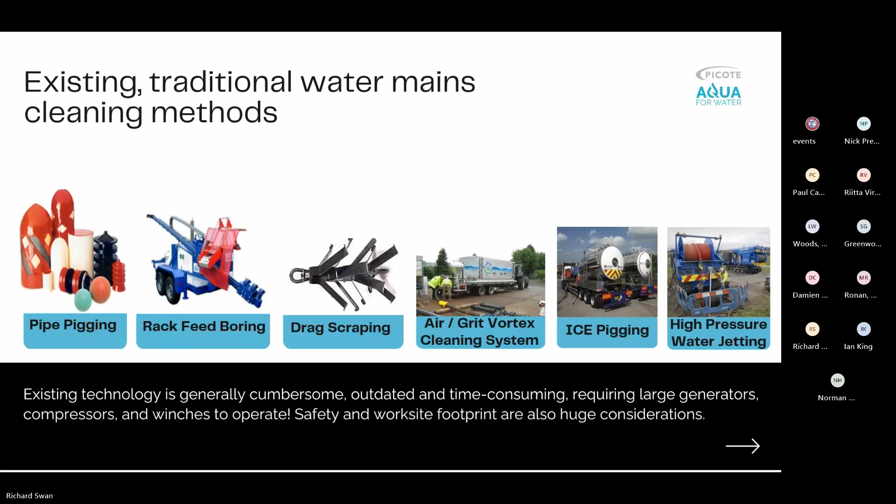So what is high-speed cleaning for water? What we've done is taken the fast, efficient machines that are widely used in the wastewater side, in drains and sewers. It's tried and tested, and we developed a whole load of innovation of tools etc. to go to work in this industry.

We call it high speed because our range of machines, at the slow speed, rotate at 500 RPM, and then depending on the machine will go up to 1500 to 2000 RPM. We have a range of tools developed to go with them that are suitable for descaling, cleaning, grinding etc., without resulting in damage to the host pipe.

The machines themselves have a steel shaft that rotates round, but we have an outer protective casing, so the operator is holding the outer casing at all times — he's not touching anything that's rotating. We have electronic control boxes, so there's a built-in safety mechanism. If the demand for power increases at some stage, the machine will trip out.

The machine trips out with the electronic safety clutch, so there's no risk of injuring the operatives etc. We also have a foot switch, so the operator controls it that way. We have the control box, we can vary the speed, and we have an emergency stop button as standard. But the important bit is that we've got a safety clutch and the outer casing holding the shaft.

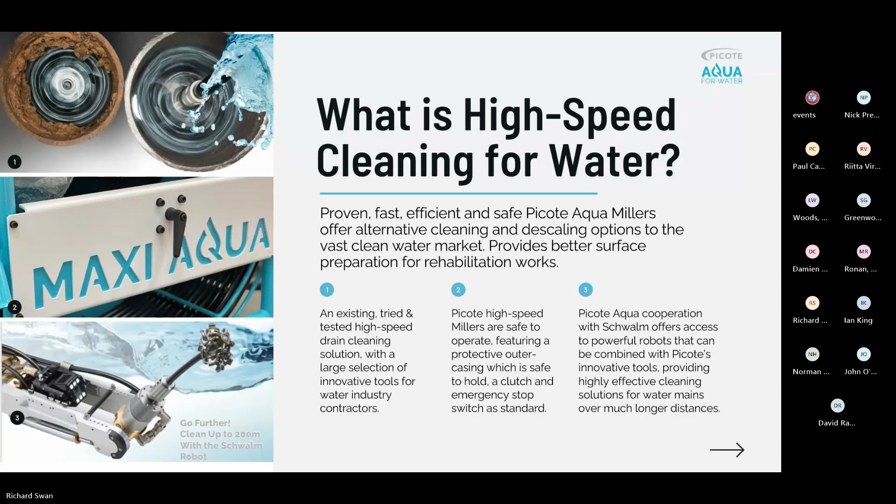So benefits of high-speed cleaning — from automation, to health and safety, because of the way the machines operate. We don't need water; we can operate the machines dry in a dry situation. Water just helps to keep the tools cool, but we don't need actual water there.

They're very efficient, and certainly when we compare to what we do on the wastewater side — descaling cast iron mains, vertical pipes, etc. — we are very, very efficient.

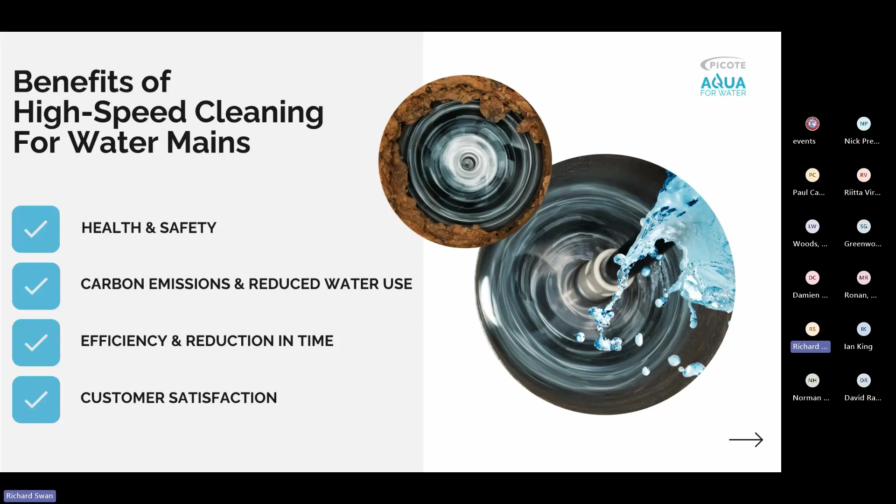For an example, what might take a day root cutting is now reduced down to an hour, maybe a couple of hours, which means it's great for the customer because we're in and out very quickly with the machines.

For those who've not seen high-speed cleaning, here's a little video. What we've got here is we're using our 12mm super MIDI, and on there we have what we call a cyclone chain. As the speed increases, the chain opens out, and as soon as the shaft starts rotating, you'll see that we start actually cleaning, and we're going to create a load of dust.

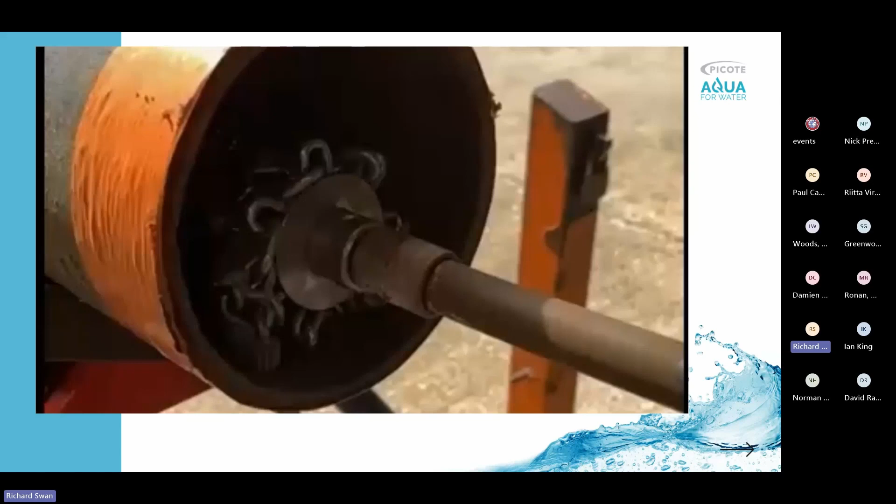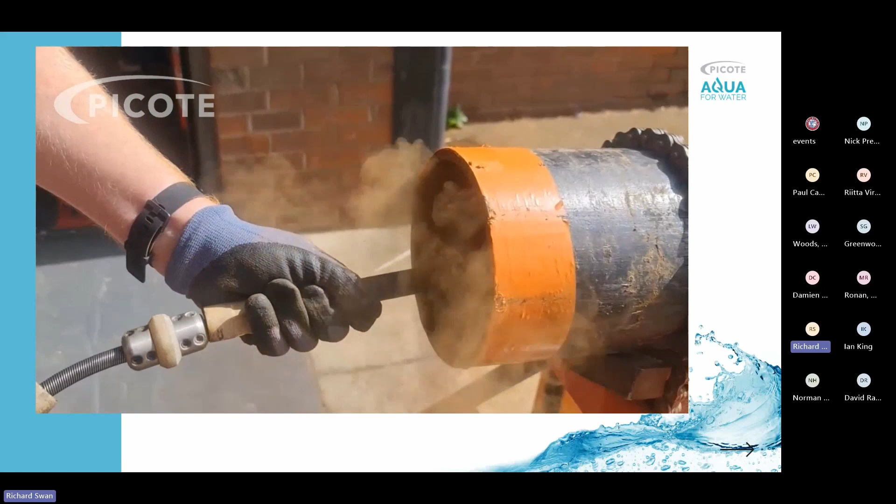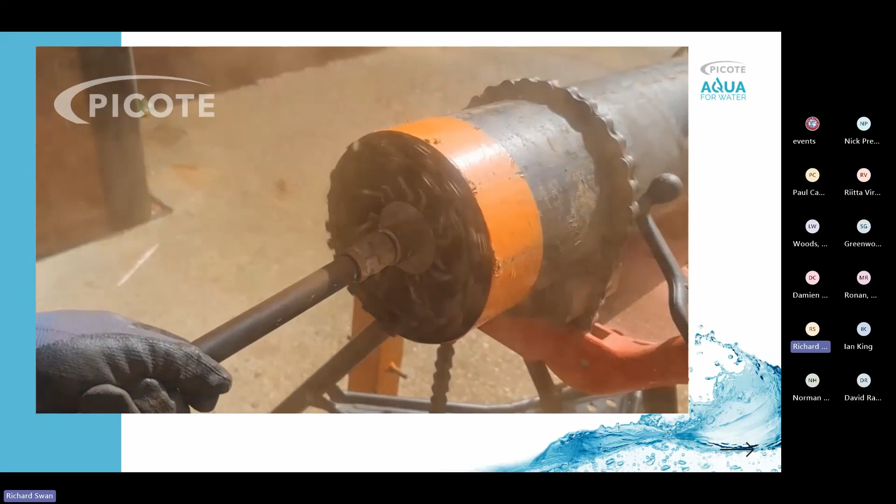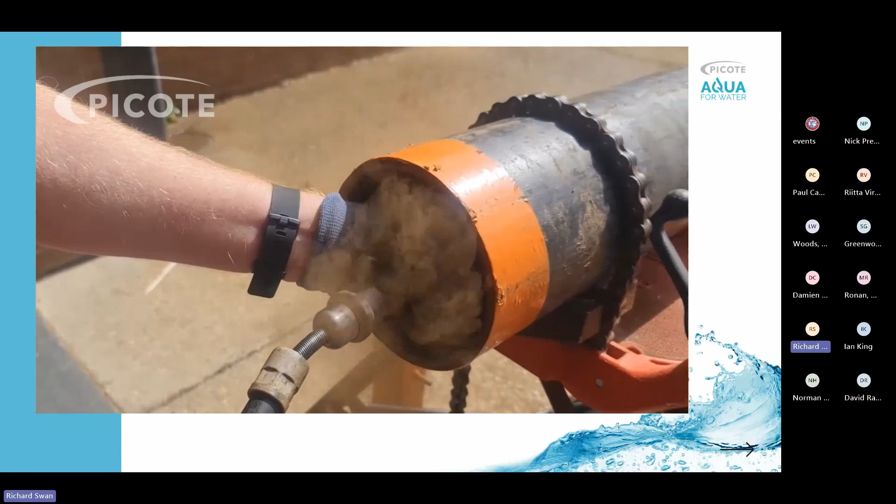This cyclone chain has carbide teeth, and that's why it's very efficient. You can see here we're holding the outer casing, and as we slowly pull back, we're descaling and cleaning the pipe as we come back. We run this through backwards and forwards a couple of times, but you can see how efficient this is, and how safe it is compared to some of the systems that are out there.

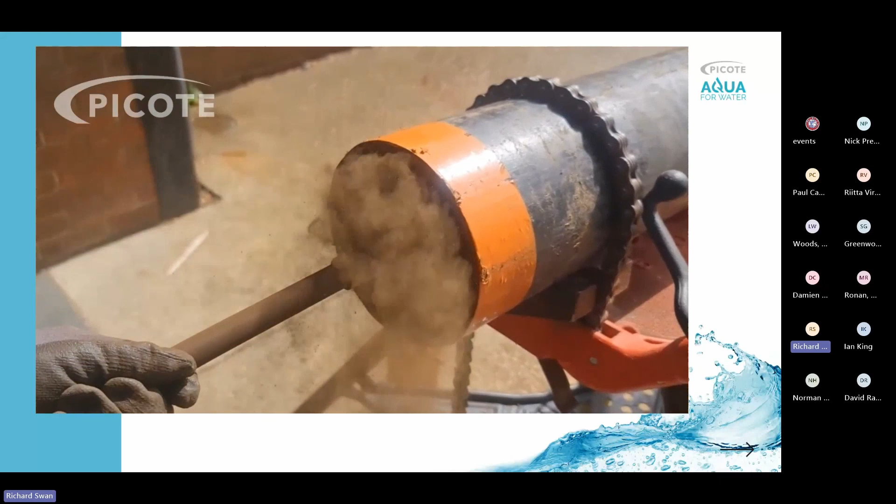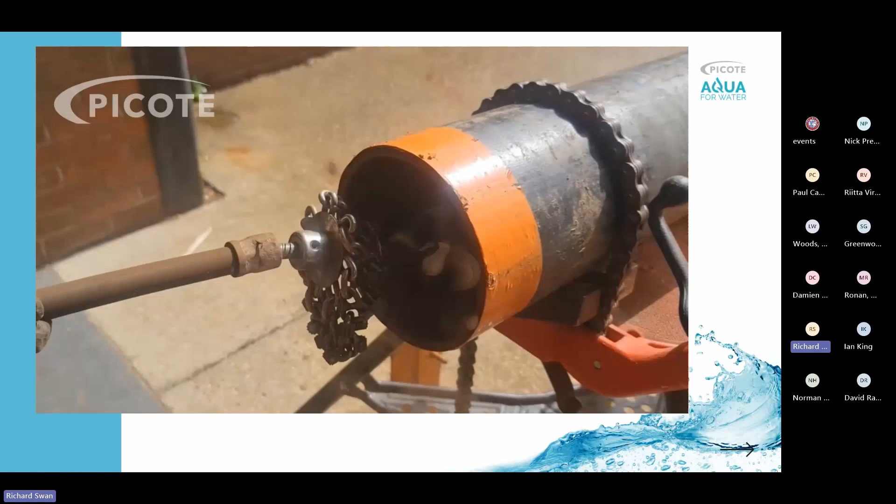So we're using the cyclone chain because we've already removed a lot of the tuberculation in the pipe. Where you come across pipes with 70, 80, 90% tuberculation, we have what we call some original chains that will go in there first, and then we'll finish off with the cyclone chains. And if need be, we have the smart cutter, which has grinding panels on there that smooth the inside of the pipe.

So we have a range of millers, depending on pipe diameter and size. The small machine we have is what we call the MIDI cleaner. It has a 10mm shaft, a maximum working length of 33 meters, and it's suitable for DN 50 up to DN 150. It weighs in at 65 kilograms, so that is a machine that we can move around very easily.

The next machine up is what we call the Aqua Maxi Miller. Again, it's in 110 volts. It has a 12mm diameter shaft and has a working length up to 45 meters from a single access point, and this is suitable for DN 75 up to DN 250.

Then we have the biggest machine that we currently do, which is the Aqua Maxi Power Plus. This has an 18mm shaft, and it has a 400 volt 3-phase motor, and again has a working length of up to 49 meters from one access point.

Generally we'll go in at one access point and we can go up, clean left, and then go right as well from the same point, so basically we get about 95 meters done from one point. The Maxi Power Plus has an 18mm shaft, and it's suitable for DN 100 to DN 300.

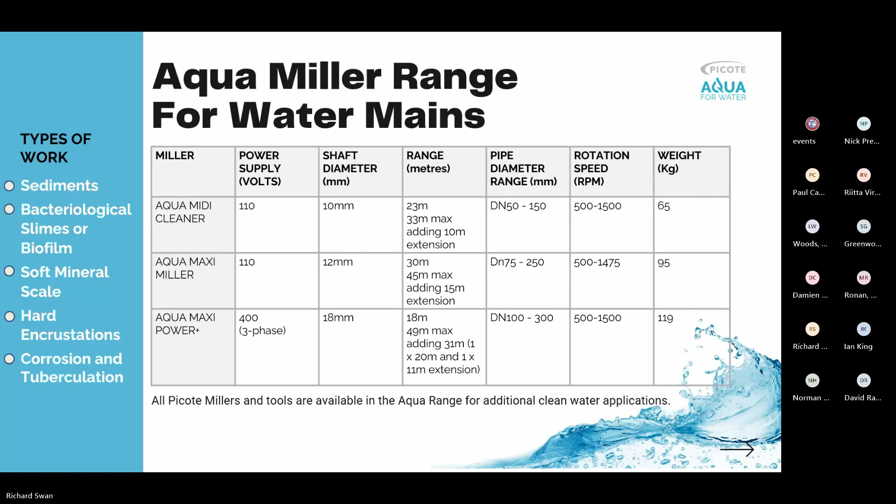So what we've actually done is, firstly, our normal machines are generally red, and we have different colored frames for different resellers around the world. The Aqua range is Aqua Blue, so we know it's specifically for clean water.

And what we've done is we've put a nanotechnology, a nano coating, on the outer casing, so we're not going to get any biological growth on the outer casing or frame of the machine. It's going to kill bacteria and viruses. We use a food grade oil as a lubricant as well. The color is Aqua Blue, and we've got Aqua on the nameplates too, so they do stand out for use on potable water or water mains.

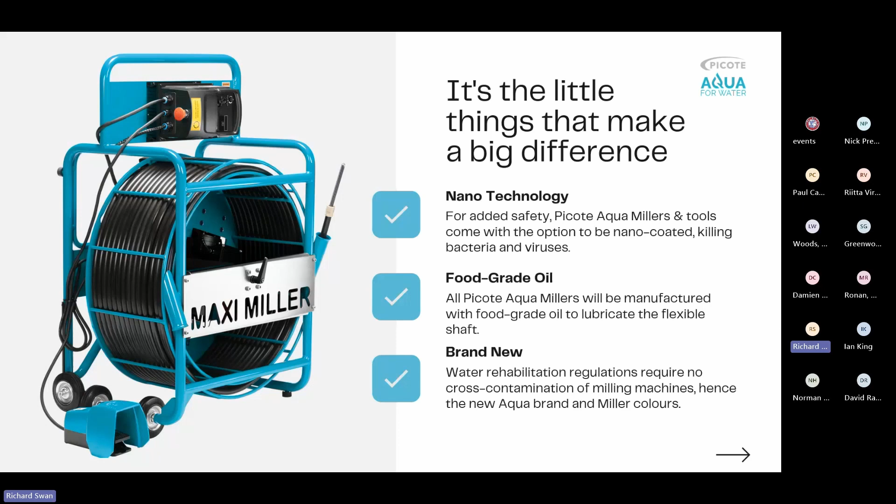The tooling that we do - initially, where we've got a complete pipe that's solid with tuberculation, we will go down with the Tiger drill chains, and they cut very effectively through solid materials. On the wastewater side, these are very good at removing hard concrete that you found in sewers.

That takes it, and then we use that to increase the flow back to about 85-90% of the bore of the pipe. The last 10-15% we'll use with the cyclone chains, because the cyclone chains have no adjustment, it's a fixed diameter. As I said before, where we need a really smooth surface inside, then what we can do is...

...we have the Picote Smart Cutter, and you can see the Smart Cutter has a hub, and on there we put in grinding panels, and we can grind back - we've got contractors who do steel fabrication works, and they use the Smart Cutter to grind away the internal weld bead.

And they're very good at it. If they can remove an internal weld bead on steel pipe, then they're going to remove a lot of things, over any hard deposits, limescale, or any incrustation at joints or any build-up. So running the Smart Cutter through really does give you a smooth surface, which is suitable if you're using some kind of spray epoxy system.

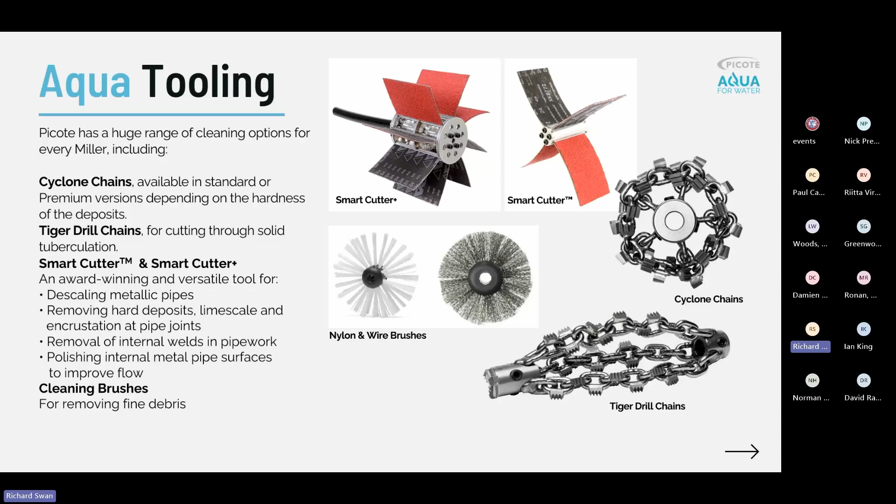One thing we do is, if we're doing it dry, we can run a bit of water through there, something like a hose pipe level of water, just to trickle. That keeps the dust down and flushes it out at the far end. Or what we prefer to do, once we've gone through with the drill chains, the cyclone chains, and the Smart Cutter, is use our range of nylon or wire brushes to remove the dust and push it out at the far end of the pipe.

So there we got alternatives: we can use vacuum extraction. We can also remove the dust using a foam pig, or as I said, flushing with water, depending on where we are and what's required. So there's various options open there.

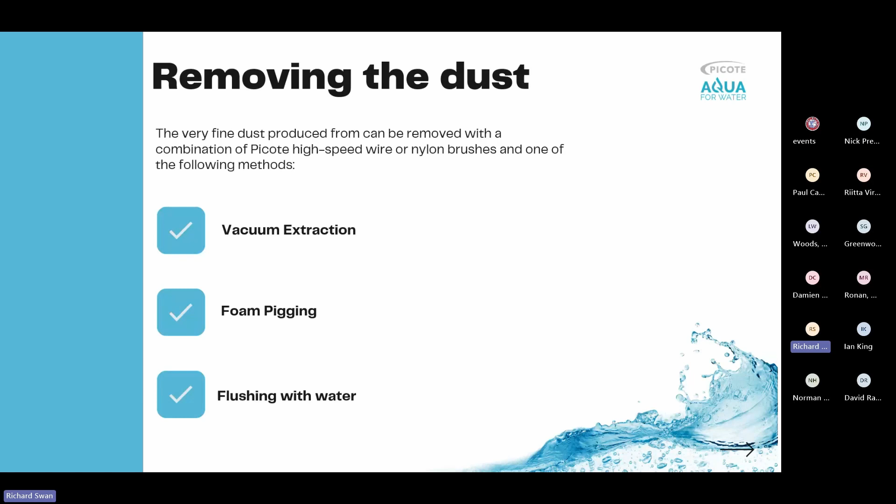One of our issues, it's not really an issue, but with what we've got we can clean up to about 90-95, maybe up to 100 meters, depending on where we're working from one entry point, and that is probably our only one. We have very few weaknesses, but that is one.

So we've been working on what we call the Mega Miller, and we've had a prototype. We designed it and ran a couple of prototypes back in October 2022, and that's shown a few issues that we're working on. It's a massive project, a lot of resources going into this one from Picote, but we're looking at 2025-2026 to have the machine at a stage where we'll start selling.

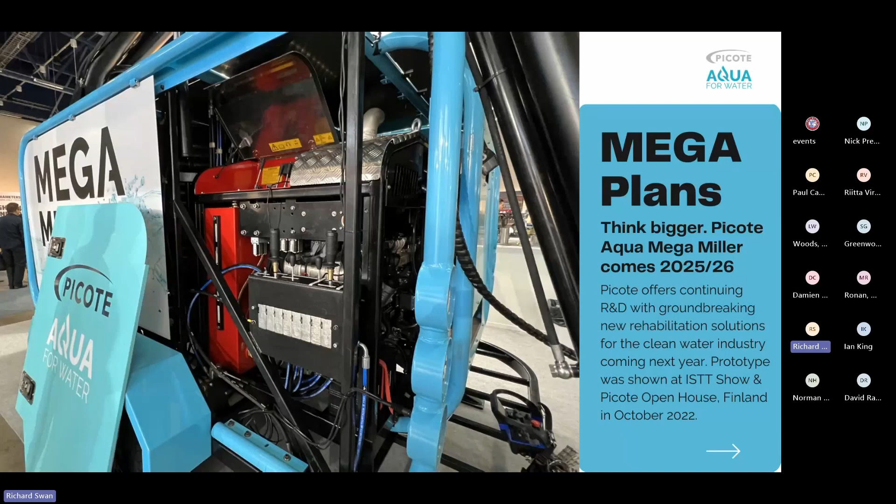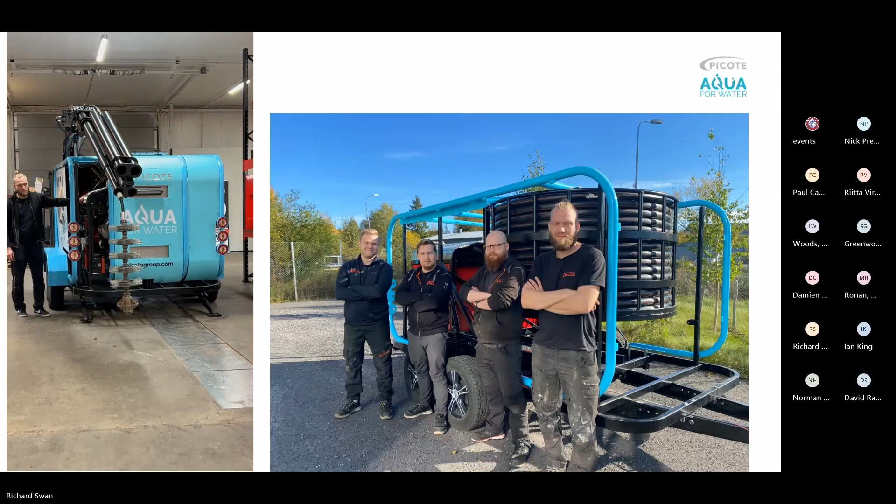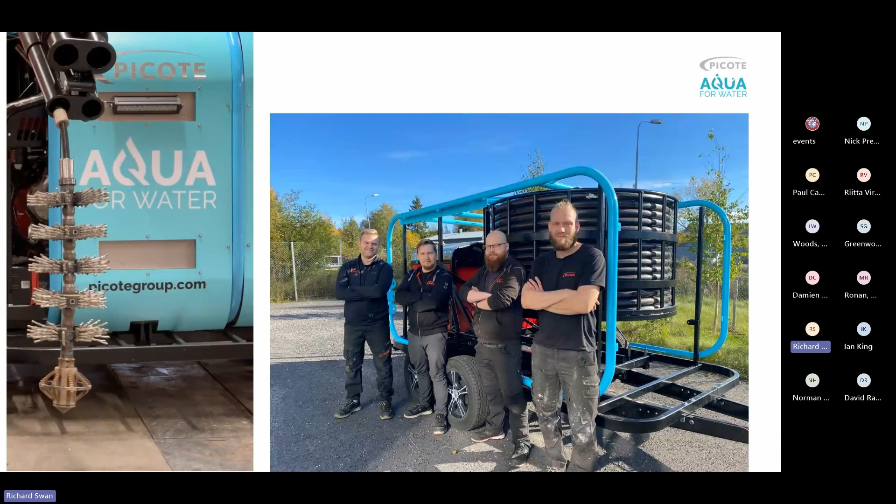Here's the first prototype that we made, just to prove it works. Got a little bit of video here that shows what we're looking at. We designed the machine, and we're designing the tools and everything else. That was the first prototype, and we've moved on since then.

Photograph on the right is our very young R&D team, who are very good at coming up with solutions that haven't been seen before, certainly in the water and wastewater sectors.

So that's a bit about high-speed cleaning, and what it's about. We've got a project here that we did a while ago. It was a water main project, up over in a place called Queensferry.

The issue here was that this water main had been on the plans for rehabilitation for a long time. Eventually, a utility contractor was awarded a contract. Basically, it was to clean 180 linear meters of 3-inch cast iron water main. It was severely choked, up to 95% in places, and the idea was to clean it, and then slip line it using a 63mm PE80 water pipe.

The original cleaning proposal: the contractor intended to clean the pipe using an air-driven stone pipe cleaning process. They tried, but the outcome was that the pipe was so badly choked with tuberculation that the combination of compressed air and grit was unable to pass down through the pipe.

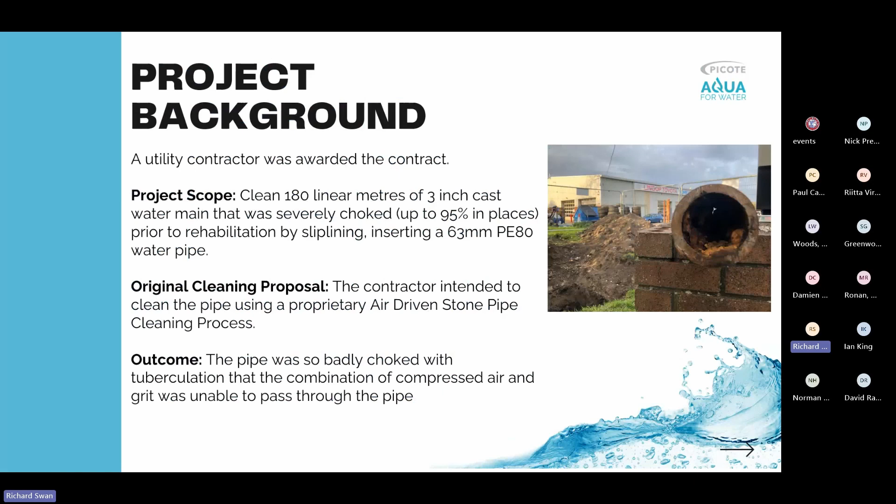The other issue they had was site conditions. We had difficult access. It was built up ground. There were multiple services crossing and running adjacent to the 3-inch cast iron water main, which is one of the reasons why they wanted to slip line it. They didn't want to dig it, and they didn't want to pipe burst it.

So we were approached, and we decided that yes, we could do it. We put a machine together. We had a brand new Super MIDI, never been used before, so we didn't have to worry about cross contamination.

We were asked to go to site. Because we used a Super MIDI, we only had a 30-meter range on that machine, so we ended up digging 4 pits, which allowed us to work 30 meters from each pit to give us a 60-meter run.

The other issue we found out is that the final section of the water main ran underneath the M56 motorway, so that was another issue. We were asked to punch a hole through so they could then use their existing cleaning method.

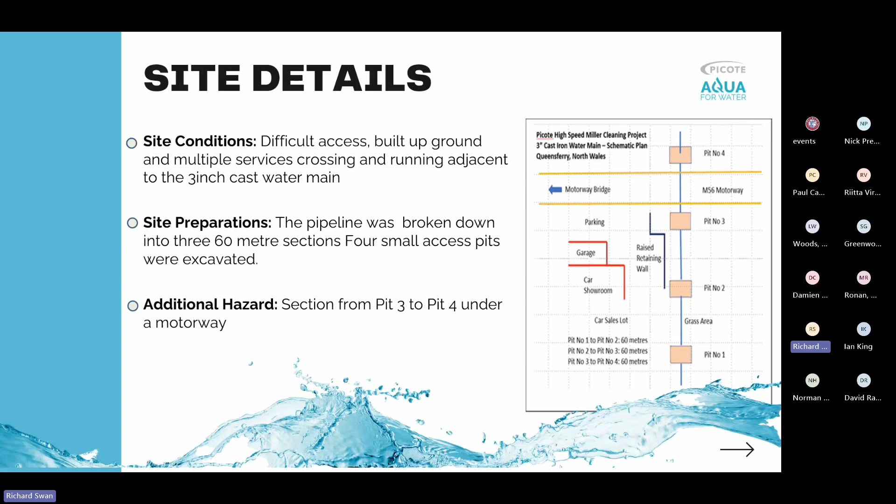So we used what I said. The only machine we had available that hadn't been anywhere near a sewer or drain was a brand new machine, the Picote Super MIDI. We used it with a 10m extension, and we fitted the chains onto a leader as well.

So you can see the size of the machine in photo 1, and you can see that we put a drill head on the leader with an original chain. So we had the chain and the drill head to make space and open up, to then let the chains take effect.

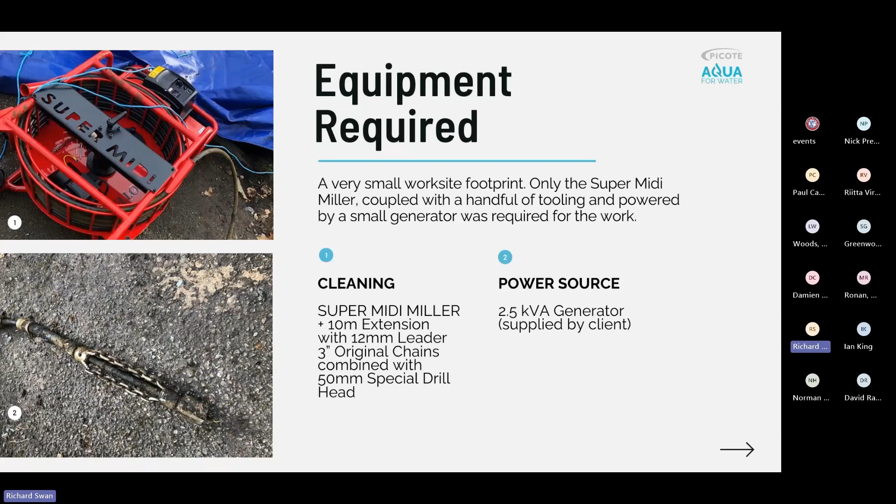The client supplied the 2.5 kVA generator. So from section 1, we went from pit 1 to pit 2, and we found there that as we were doing that, when we started to work hard with the chains, the generator started to trip out. So that's one of the things that we learned there.

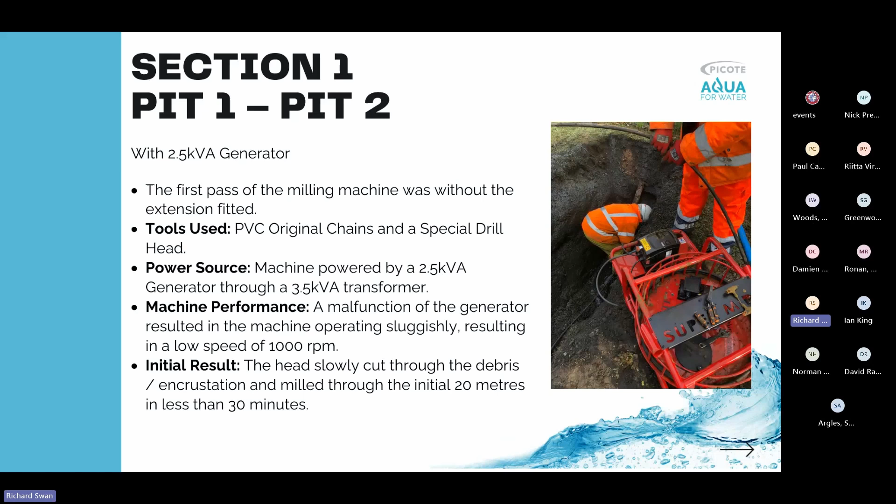In the meantime, the main contractor went and brought in a 3.5 kVA transformer, which then meant that we could actually cut through, descale and clear at the same time. The first 20 meters, we did in less than 30 minutes.

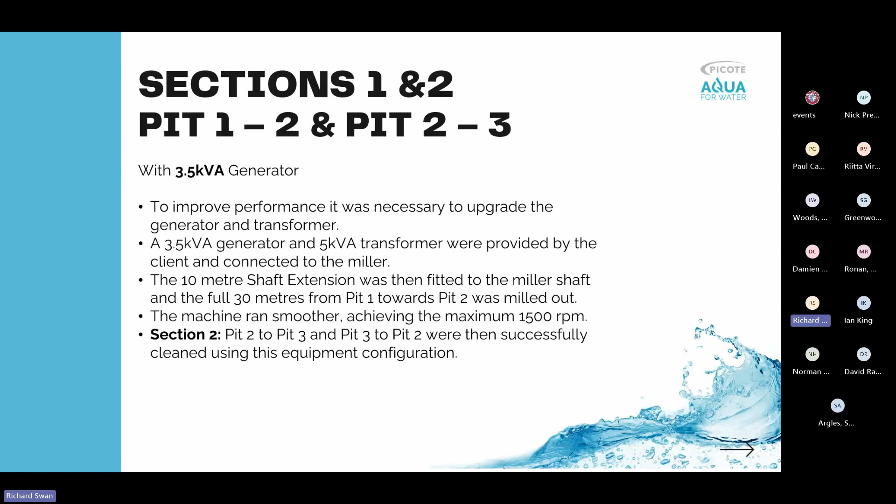Like I said, to improve performance, we brought in a 3.5 kVA generator with a 5 kVA transformer. We then fitted the 10-meter shaft extension to give us the full 30 meters from pit 1 to pit 2, and then we went from pit 1 to pit 2, pit 3 back to pit 2, etc. We worked backwards and forwards from both ends.

What we found then is that, now we'd got the correct measure, we were cleaning 30 meters in less than 30 minutes. That's a pipe that is 95% choked with tuberculation, and we were cutting through and cleaning it in less than 30 minutes. Again here, you can see the machine is very small, so we can just wheel it into place, a very small footprint.

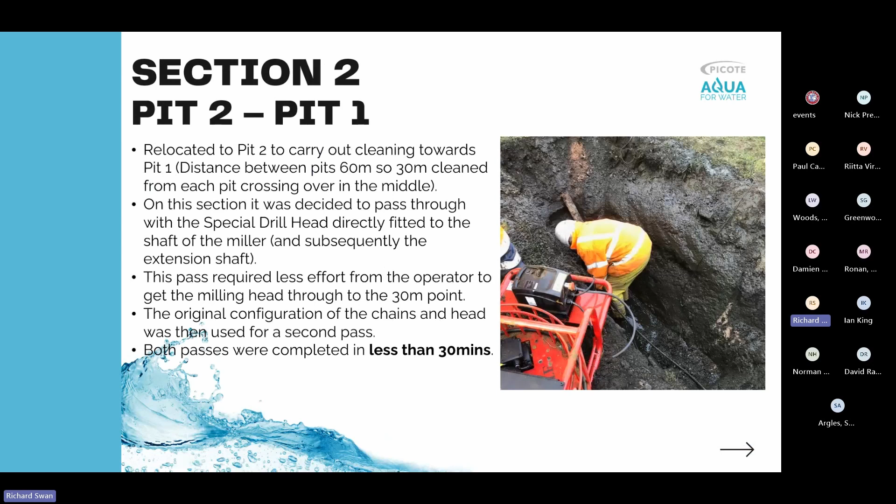The final section, between pits 3 to 4 and pit 4 to 3, were underneath the M56 motorway, and I can remember asking Andy, our technical trainer, did you do anything different then, apart from when you got to the motorway section?

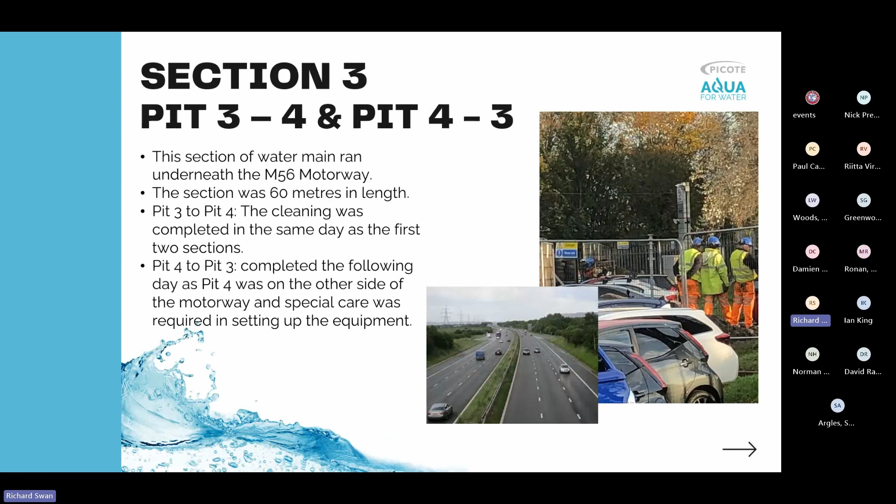He said yes, he tightened up the tools onto the shaft, and then got the lead engineer on the job to check they were tight, and the contract manager was there and he checked as well. I said okay, and that was very, very successful.

We did successfully clean, and we were asked to punch a hole through. We did successfully clean 180 meters with the Picote tools and equipment, to such an extent that there was no further work required. We totally took everything out, all the tuberculation.

We took it right back to full bore, and the contractor commented - I know when Andy turned up, he got out, and the first thing they said was, okay, good to see you here, where's your equipment? And Andy turned around and said, well, it's in the boot of my estate car. So at the end, we got a comment from the contractor saying that the 26-ton specialist vehicle couldn't achieve what a machine that fits in the rear of an estate car could do.

And that's the size of the equipment that we're looking at and the footprint.